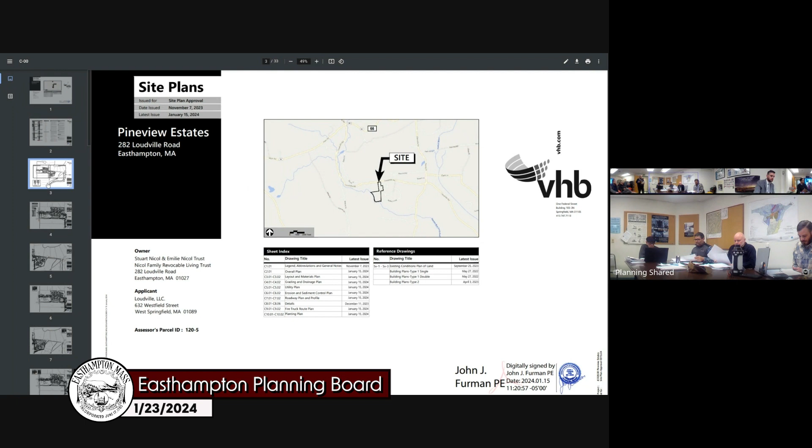We were taking all of the single buildings, not all of them, some of them, and sliding them together to create a multifamily configuration. So on the plan set, which I'll go through a little later so we can point out the discussion, the concept we prepared was turned into a formal set of plans, which is what we submitted.

The cover letter is broken into two sections. The first addresses the only comments we had to respond to, which were from the city engineer, dated January 7th. The second part of the letter basically goes through the plans, identifying what the changes were. So on the first part, I paraphrased the city engineer's comments.

They're not word for word, but in general, his first comment asked about the downspout. We had a detail on our plans for the downspout connection. I think we covered that as well. That was one of the questions I had during the first meeting. Okay, so it was nice to see the same response, and the engineer had the same question. Yeah.

So just to confirm, the house is planned to have just gutters. If a potential owner wants to connect the roof up to it, they can run piping up to it. But the driveways all slope to the roadway, so roadway water is captured and goes into the basin.

So that's the answer to the first question. The second question was about the actual field testing—he was supportive of doing that. The DEP requires that we have testing in the basins.

When we did the original testing, we based it on a concept we had at the time. As we got into design, things moved, so the basins ended up in a different spot than the test pit, so we went out and grabbed two more. We did get different results on the infiltration testing, which I have in the cover letter. Originally we got 85, 52, and 69 feet per day of infiltration. On the two we got in the basins, we ended up getting 36 and 60—one was less and one was more.

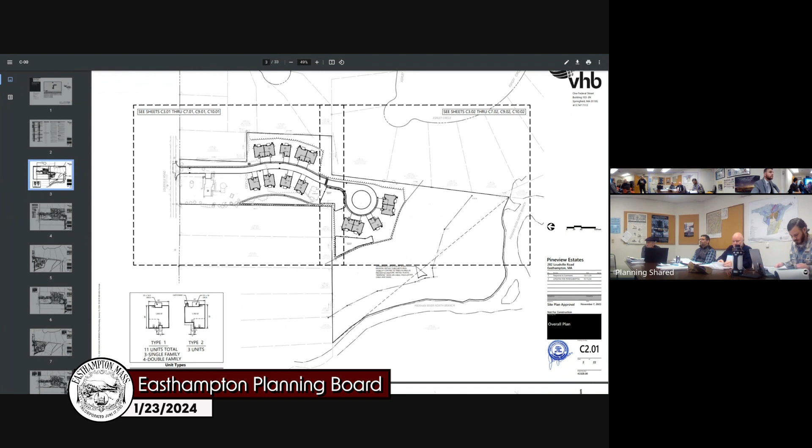Can we just go to the next plan? Let's rifle through these. As we start getting into these plans, it does an enlargement so you can kind of see what's going on.

One item here, which we'll see on the updated landscape plan, is at the bottom of the plan. Behind those units there's an arc that wasn't there before. The landscape architect suggested we redo that area—it was all non-native invasives. We saw that on our walk; it's kind of viney, bittersweet, and killing the trees. So we had a note to clear that out and save any of the larger trees in the wooded area.

What we're doing there is creating a 3-foot plateau, a 3-foot berm. Then on the landscaping plan, we're loaming and seeding that, and planting trees around it to create a buffer area. So that's what you can notice on this one.

Could you go back to the overall plan, please? Right there on the bottom, see that area. We had talked about that eroded area and installing some sort of protection through there.

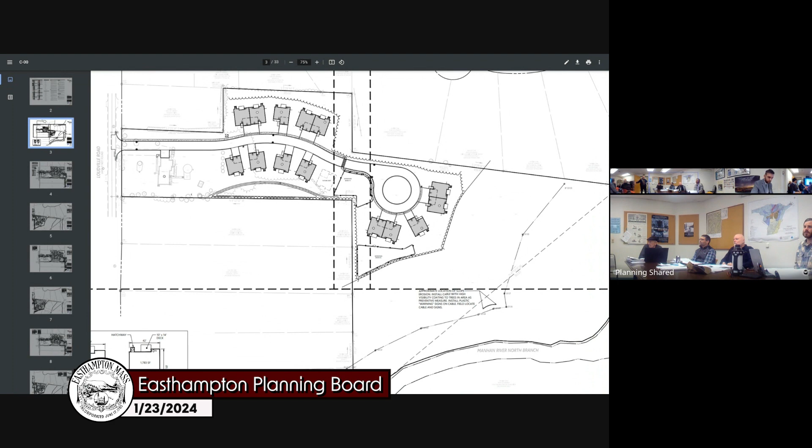When we met out there and walked the site with Jeff, Cassie, and Dylan, Cassie thought anything we did out there would be exempt from the Conservation Commission because it's basically just installing a fence. What we showed here is just a cable strung between the trees of the eroded area. You really can't get around it if we're planning for it to be field located. We're calling for a high visibility coating on that cable—so if you have a small cable, put tubing on it that's a color so it stands out.

What height would that cable be at? We don't have it specified, but it's more just a warning type of thing, with signs on it that say warning, alerting someone that on the other side there's some sort of danger.

There was a concern it might be something for 4-wheelers who could become decapitated, but it's set back. The path is here, and this is set back in the woods close to the erosion, so if you're getting decapitated on that, you're going over the embankment. The intent is just to provide some sort of warning.

What would the cable be made out of? It could be steel, small, doesn't have to be a thick logging cable—something very small you could throw it in. We just call for it to be field located, something very simple, but just to alert somebody that there's something there.

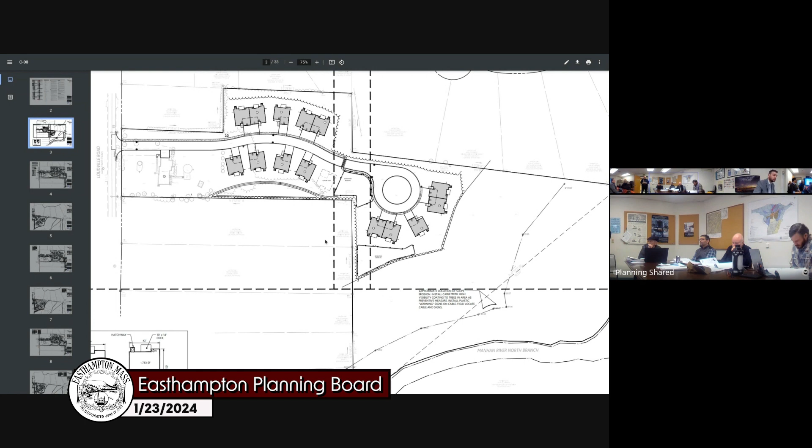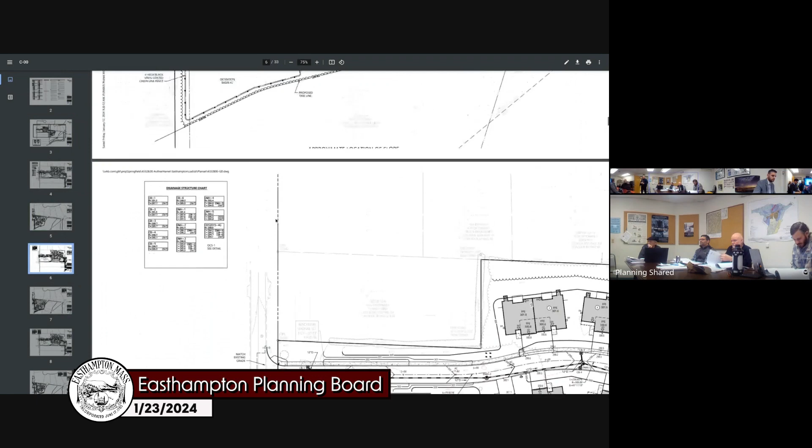Okay, all right, so if we keep going forward, that would be great. The grading—no changes on any of these. I think we want to get all the way to the end where the landscaping is. I think that is the next one. It should be towards the...

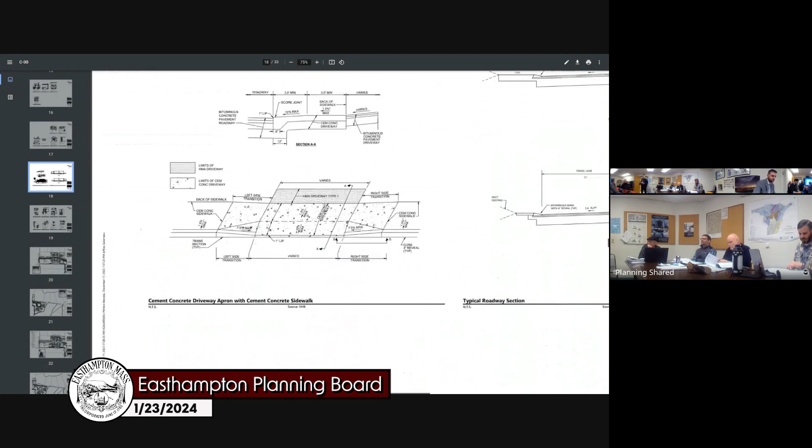Try one of those. Section, keep going down, yeah keep going. That is the fire truck route that hasn't changed, so it should be one of the next ones.

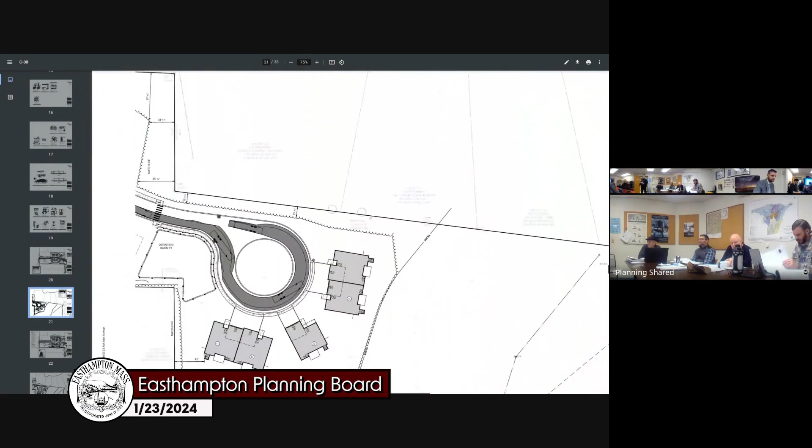Okay, right here, let's slide that over a little bit.

As a result of all the abutter meetings, we presented something very similar to this at the last meeting in concept, so we made it part of the documents. The buffers have all been increased as far as the cutting goes, so 10-foot minimum. I think that one in the corner is showing 34 feet, if I'm not mistaken. So they've increased quite a bit.

There was a comment on this view towards the back about the quality of the existing buffer, and an abutter wanted it all taken down and replanted. Our response was that we prefer to keep it, because even though the bottom part is of poor quality, it has a nice canopy on top that provides upper shielding. So the trees we're planting are intended to fill the gap, giving you a full barrier here.

We did add a note here, since there was a concern along the property line that the sticks from those trees would be touching your fence. So we added a note that within a couple feet, just break off the sticks and make sure nothing overhangs the property line. That's generally very simple.

You can see the arced area at the bottom, cleaning it all up, loaming and seeding it. All of these areas are a mixture of evergreen plantings, and we specify what is available at the nursery, so it's either pine, fir, or spruce. We didn't want to say it's going to be this specific species, because if we say it's going to be spruce and they don't have any, then we have to look for them. So what we did is identify the species and size, but what ends up there is what is actually available at the nursery. That's the way the notes are written.

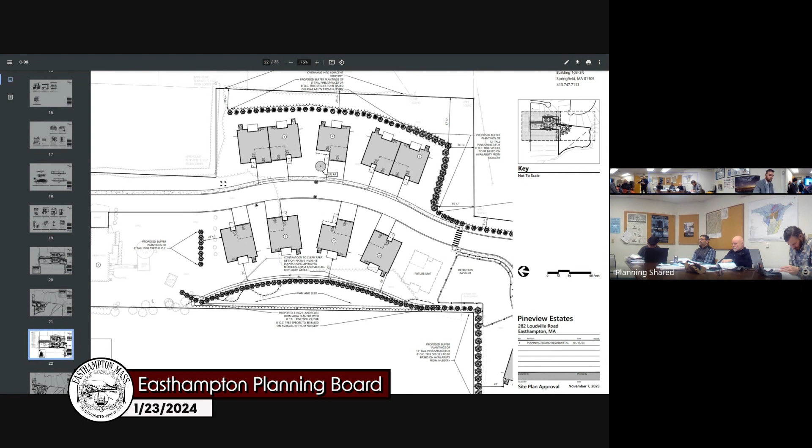On the bottom, we turn the corner and run along that property line. So if we go to the next one, we pick up the edge, go down. Next slide, yep, and then move over, there you go. So we pick up the rest of it. The sizes differ between the different sections, and the arrows point out the limits of the sizes that we're planting.

As we get from the property to the corner and go down towards the detention basin, those plantings are a little bigger. In the detention basin area, we specify plantings, but they're a little bit smaller because there's really nothing there to shield, it's just a detention basin. We did add fencing around all the basins with an access gate that's locked, so it protects people from going in.

The only other item we changed is the cul-de-sac, and we can probably see it right here. Originally, as we were coming down the roadway, we have bituminous berm curbing on either side. When we get to the radius, it transitioned to a vertical granite curb around the outside and a sloped granite edging on the inside. In talking to maintenance people, we were told that the granite curbing would be a problem from a snow plowing perspective, so on this plan set we removed all the granite curbing from this area.

We converted to a bituminous berm, a Cape Cod berm, which I think we're all familiar with. It's 12 inches wide, 4 inches tall, and the plows kind of skid right over it, it doesn't chew it up like a bituminous curb would. Bituminous curb is 6 inches tall, and when you hit that, it kind of busts it and gets rid of it. So that's a change we made here.

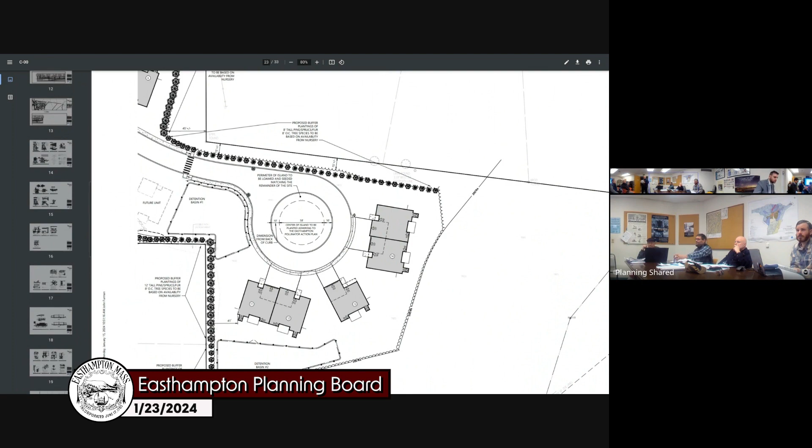If you go to the end of this, you'll see we've included the house plans for the three building types right through here. Each one has a floor plan and an exterior elevation. We just appended them to our site plan set. The buildings will be very similar to what is in the Stepler project as far as design and look.

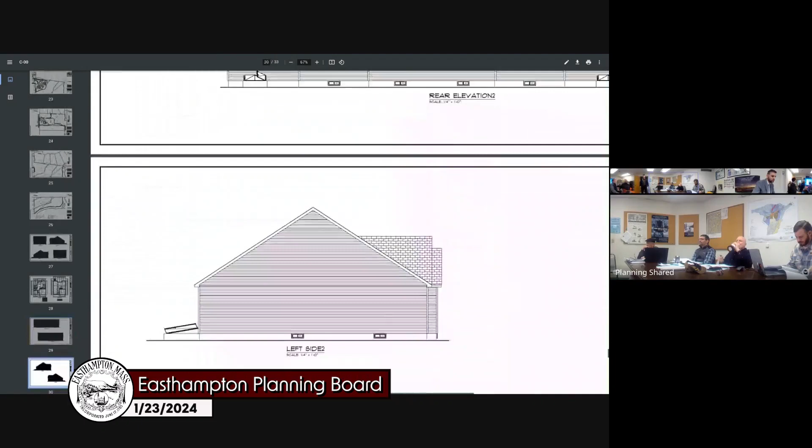Because we have an audience here and everyone's looking, you're doing exactly what I need you to do, Dylan. Just scroll through it, make sure everyone gets the gist of it. Didn't mean to interrupt, please continue.

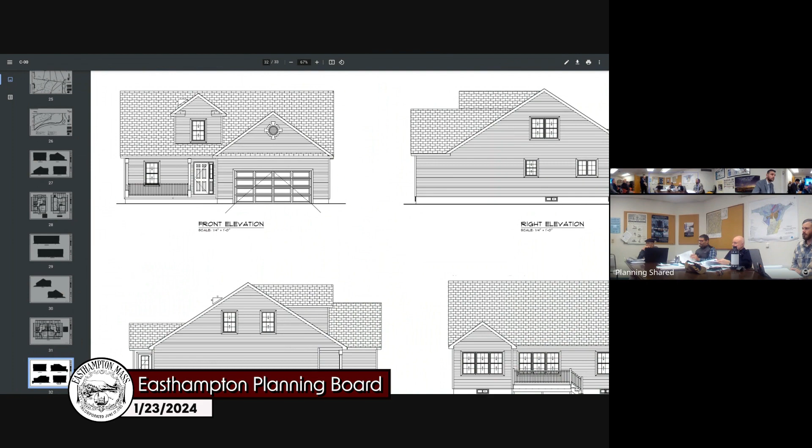No, and that's really all we had. We were just handed some comments that came in, one from the city engineer and a couple from the abutters group. The city engineer is questioning the stormwater pollution prevention plan. I've mentioned that a few times in previous presentations, and that's actually a construction document. It's required if you have a site that disturbs more than 1 acre of land, you're required under the EPA to file for a general permit for construction, and part of that filing is preparation of a stormwater pollution prevention plan.

In 2023, the requirements for what's included in a SWPPP were redone by the EPA and the Corps of Engineers, and they're very detailed. The SWPPPs I've seen are probably now a ream of paper. It's a guidebook for the contractor that identifies all options available to him for stormwater management and erosion sediment control during the process.

What we show in our plans is the start of the thing. He's going to put in what we have on the plans and what the board approves. If during construction there's a contour or a pile or something that directs water to one of the erosion control barriers, and it happens to be overwhelmed, there's a certain requirement he has to follow in that SWPPP. He has to correct it, note it, and file the report in the SWPPP. So it's a living document from when construction starts to when it's closed.

There's inspection requirements too. He does an inspection of the basins. You have to be approved by the Corps of Engineers to be an inspector now, you have to take their training course. Once he gets through it, he signs it, puts it in the book. So that has everything in it that he'll need. The engineer was asking who's going to prepare that, it would be the contractor. He recommended doing it 60 days before construction start, that's probably about when you need to start because it's so complex now, but it doesn't need to get filed with the EPA until 14 days prior to construction, and it can only be filed electronically.

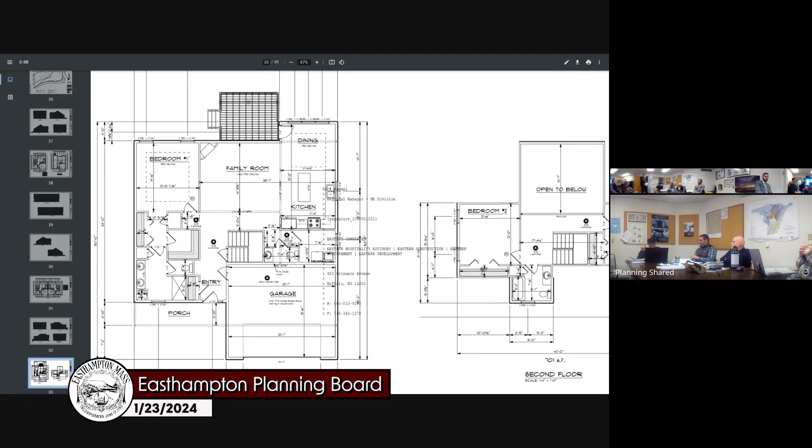I see you included the trust, which is essentially the HOA. Yes. I noted one thing I didn't see in there was anything about the maintenance of the pump, the sewage pump or lift. I'm not sure, I think these are draft documents. Yeah, I think they were just generally providing so you can see the intent. Those need to go through and be finalized, but it would have to be in there, yes.

At this point, I'd like to ask the board if they have any questions about the presentation or anything in general. Yeah, it's just on your last point, so EPA, with your 1 acre disturbance, what's the disturbance again on the site? It is a little over 3.5 acres, I believe.

You might want to look at that. I'll look into that. So that would require you to have a SWPPP and that permit in place, so we just may want to touch on that. I'd have to say anything that Massachusetts requires is gonna be far less than what the feds require.

The SWPPP usually goes the other way, no? Federal, then the state gets a little stricter, that's my experience. I've looked at environmental regulations, dozens of SWPPPs, and I've never seen a more comprehensive document. It's incredible. So they really went around and did their way with it.

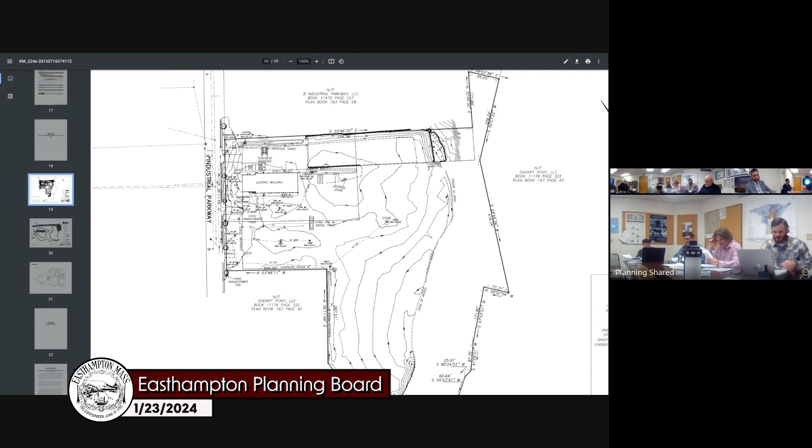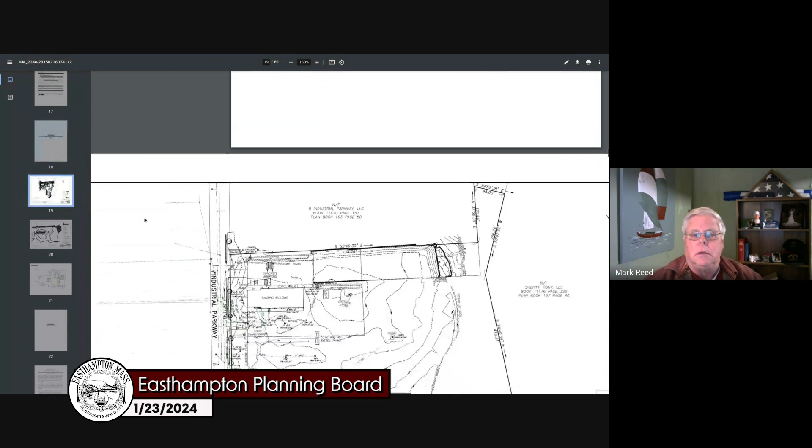And the plantings that were done are shown in more detail on the enlarged plan. If you look at that, they're towards, as Jeff mentioned, the rear of the site on the northeast. And the plantings have been done, correct. So that's within the right-hand top section of that plan.

And Mark, that was all the direction and approved by the conservation agent, sounds like? Correct. Okay.

I'm gonna jump off from this if you guys have another question for right now. What about the fencing? I know there's a preliminary fencing plan in here. Can we talk a little bit about what you guys are planning on doing?

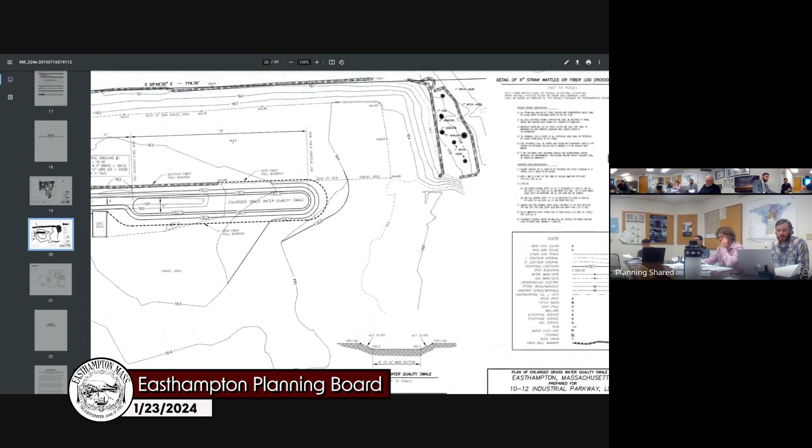Yeah, you guys want to describe it? We've got a rough, approximate location for it. It's going to be chain link fencing. As of yesterday or today, they got an equally rough outline from Four Seasons Property Maintenance, which is going to be installing the fencing. It's going to be 1,174 linear feet of chain link fence. But we don't have exact location on the plan because they're just not that far along with it yet.

And just plain chain link, or are there any - plain green? Chain link. Okay. So I don't know if you've seen the site recently, but it's pretty well screened from the street because of that fence that runs along the edge of the parcel.

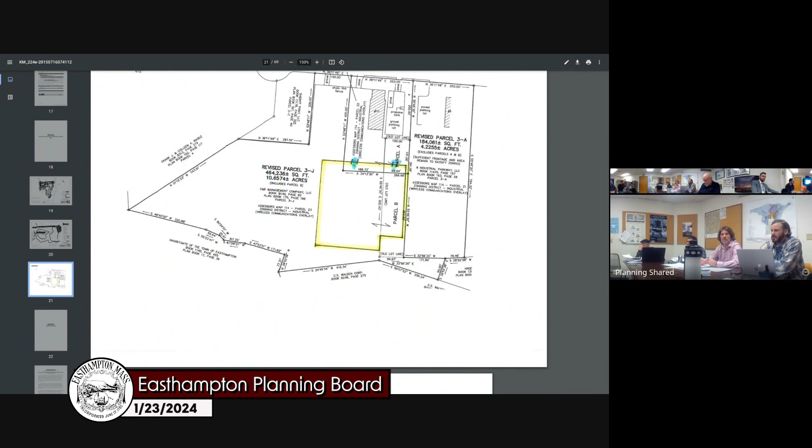Okay, yeah, I thought that was only triggered when you're within a buffer zone or something. It depends - if you're not in a regulated industry, then it doesn't matter, you can let water leave your site. If you're in a regulated industry, you have the option to not allow water to actually leave your site. And that's why you see a lot of people in these industries with big berms and no catch basins, no floor drains, containment. What industry is triggering it?

4214, local trucking with storage, under Sector P, land transportation and warehousing. Okay, so it is trucking that's triggering it. Yep, trucking, local, combined with storage, under 4214. And that's the, whatever they call them, the NAICS industry codes, I think, off the top of my head.

But so we don't need to see that - we have our regular conditions. They need every other permit and condition and license that they need, right? So that one, it's helpful to tell them, but that's a separate obligation. I guess we don't necessarily have to condition anything on that, but I will just say that if the state or feds come and you don't have that and you're doing that, it's not good.

So I think the fencing and lighting are the only things. The thing that Jeff had mentioned too, we could either come back next week with a plan, or we could condition it on before a building permit. We need to approve that, and we would just have a public meeting again about that.